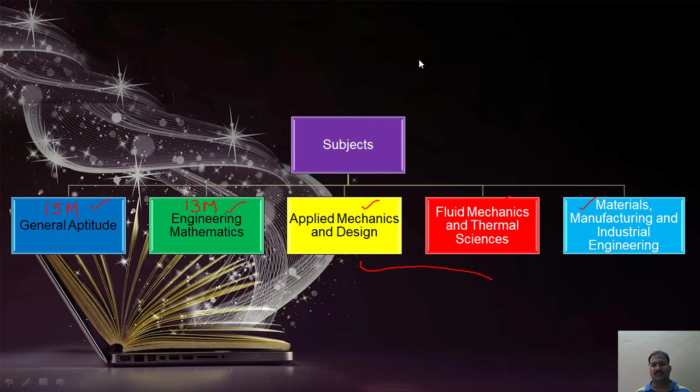These are the major subjects, out of which general aptitude is for 15 marks. This time it has been given that engineering mathematics will have a weightage of 13 marks clearly. In previous years it was not mentioned how many marks there would be for engineering mathematics, but this time it was clearly mentioned that there will be 13 marks for engineering mathematics, and the remaining 72 marks will be for the three major areas of technical subjects.

Now coming to general aptitude, there is a variation in the syllabus compared to the previous syllabus. Previously we had verbal aptitude, quantitative aptitude, and analytical aptitude. These three were there, and this year spatial aptitude is the new concept that was included. Spatial aptitude concepts will be majorly asked in military recruitment, or you may come across in defense examinations, AFCAT.

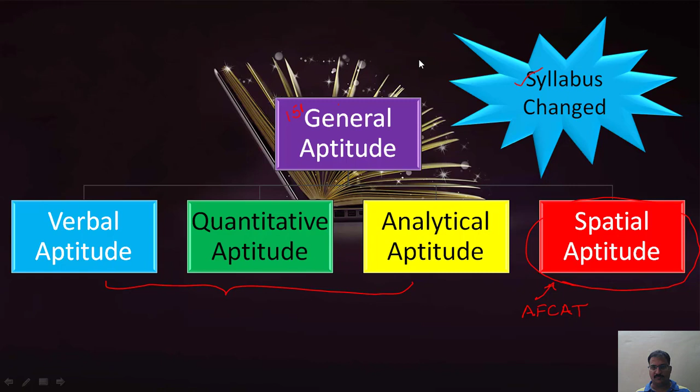So all these examinations contain spatial aptitude questions. You can refer to particular books so that you can get more of these spatial aptitude questions and solve them. As the weightage is for 15 marks, this plays a very important role in order to qualify for the GATE examination. So here are the changes.

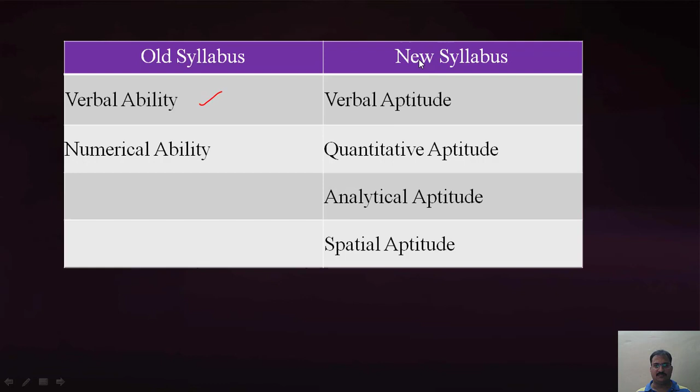In the old syllabus we have only verbal ability and numerical ability. Numerical ability includes quantitative aptitude and analytical aptitude, which has data interpretation and all these different kinds of things. The newly included topic is spatial aptitude.

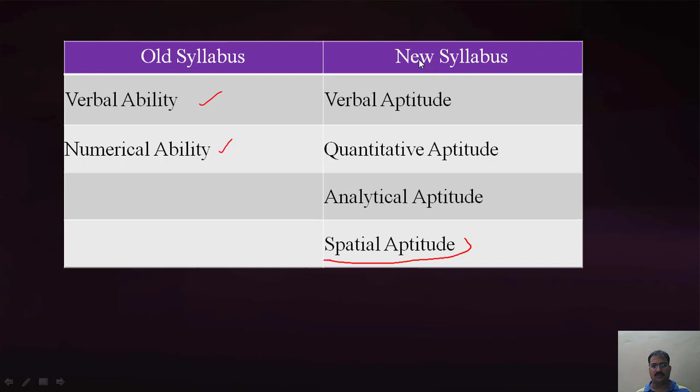Now coming to engineering mathematics, there are no changes in the syllabus. In engineering mathematics you have linear algebra, calculus, differential equations, complex variables, probability and statistics, and numerical methods. Usually you study all these subjects in your engineering in the first, second, third, and mostly in the fourth semesters. As he said, this year engineering mathematics is going to be given for 13 marks.

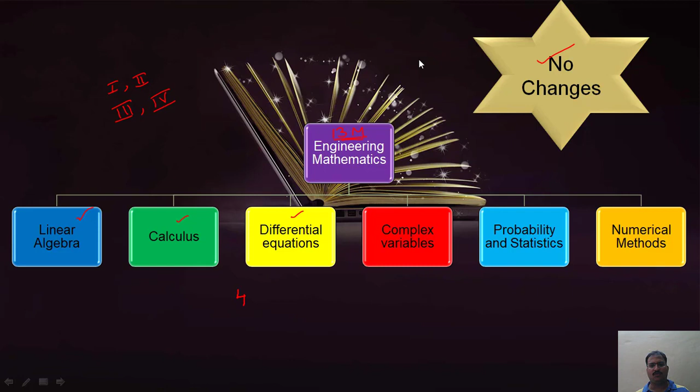So you should be very thorough with these questions, and there is an expectation that there might be 4 two-mark questions and 5 one-mark questions. This is a wild guess, I don't say that we get clearly these marks only. So the probability of getting 4 two-mark questions and 5 one-mark questions is a little higher.

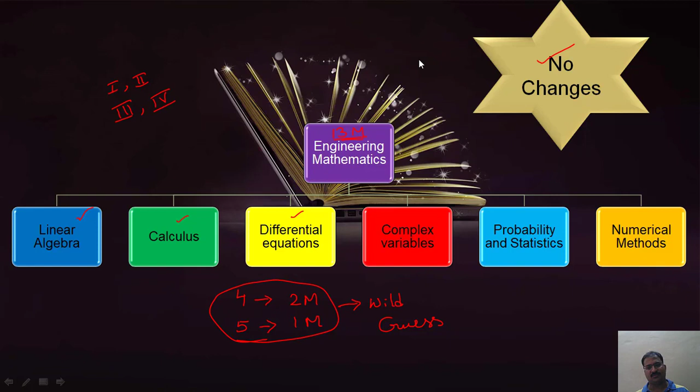Now coming to applied mechanics and design, the syllabus is changed in two topics: engineering mechanics and mechanics of materials, and theory of machines, vibrations, and machine design. The syllabus is as it is, just like the previous cases, but it's changed in engineering mechanics and mechanics of materials. Mechanics of materials, as you already know, is also called strength of materials.

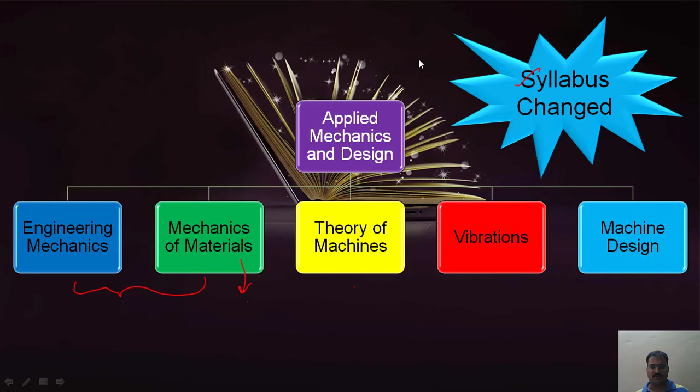Now I'll show here the variation in the subjects. In engineering mechanics, the additions are friction and its applications, including rolling friction, belt, pulley, brakes, clutches, screw jack, wedge, vehicles, etc., and Lagrange's equation. These are the topics that are added in engineering mechanics, and there is a deletion of kinematics and dynamics of particles collisions.

So I don't say that you may not get questions from these two deleted topics. There is a chance of getting questions from these topics also, so try to solve these questions too, and there is a chance that you get questions from the friction topic in engineering mechanics. Then coming to mechanics of materials, the concepts added are thin cylinders and the concept of shear center. These two also play a very important role in strength of materials, and there is a chance of getting good weightage of marks.

Next, theory of machines, vibrations and machine design has no changes. Whereas when it comes to the second part, that is fluid mechanics and thermal sciences, in this fluid mechanics and thermal sciences, the syllabus is changed in the fluid mechanics part and the applications part.

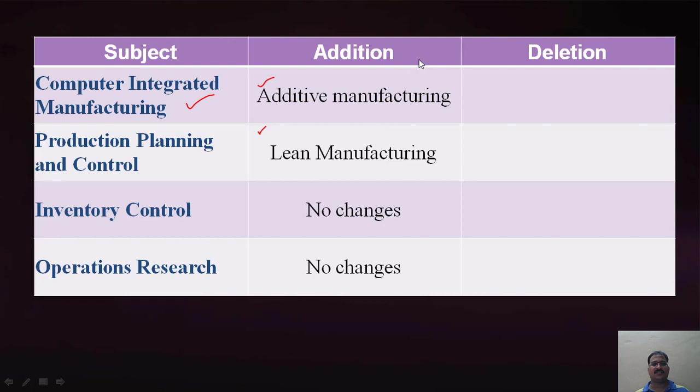Then coming to computer integrated manufacturing, you have additive manufacturing, then production planning and control, you have lean manufacturing, then inventory control and operation research - there are no changes. So the changes were there in computer integrated manufacturing, production planning and control, machining and machine tool operations, and metrology and inspection.

So dear students, one thing I am telling you clearly is you should be thorough with certain subjects so that you can easily qualify in the GATE examination. For example, the subjects you should be very much careful with are engineering mechanics and mechanics of materials. So these two together, there is a chance of getting 11 to 13 marks.

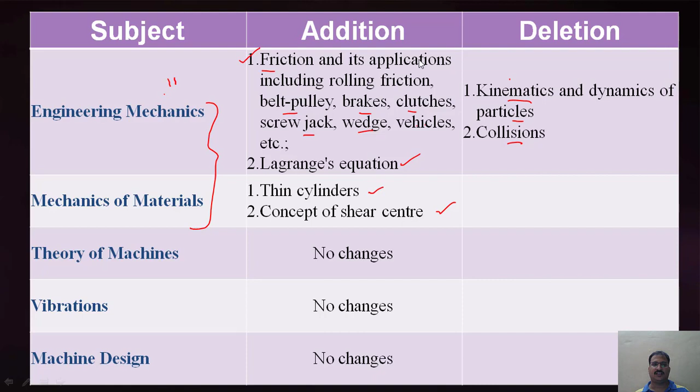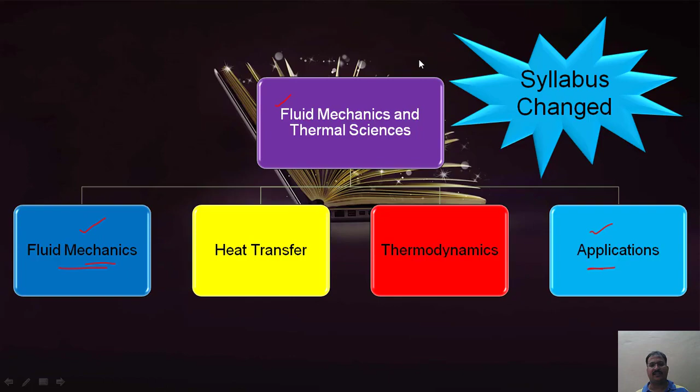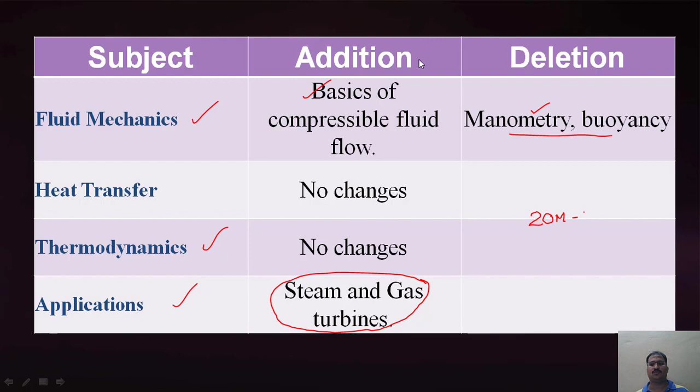Then coming to fluid mechanics, thermodynamics and applications part. So from these three subjects, there is a chance of getting around 20 marks. Fluid mechanics, thermodynamics and applications, these three together, there is a chance of getting in between 20 marks to 22 marks. So try to read these subjects carefully.

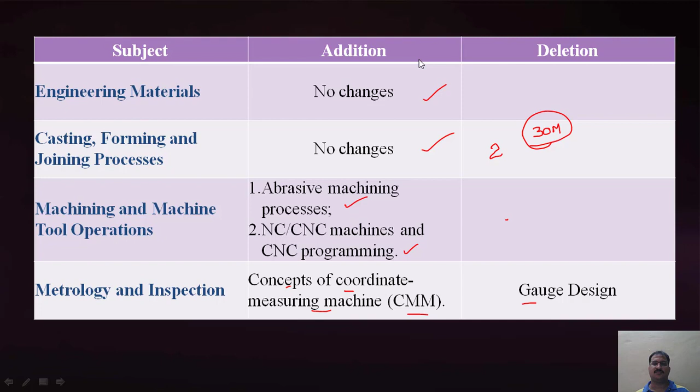And coming to materials manufacturing and industrial engineering, this part will have maximum weightage in the GATE examination. As you know, this is the bigger concept. So there is a chance of getting around 30 marks from these subjects. I don't say completely 30 marks will be obtained. So around 20 to 30 marks will be obtained.